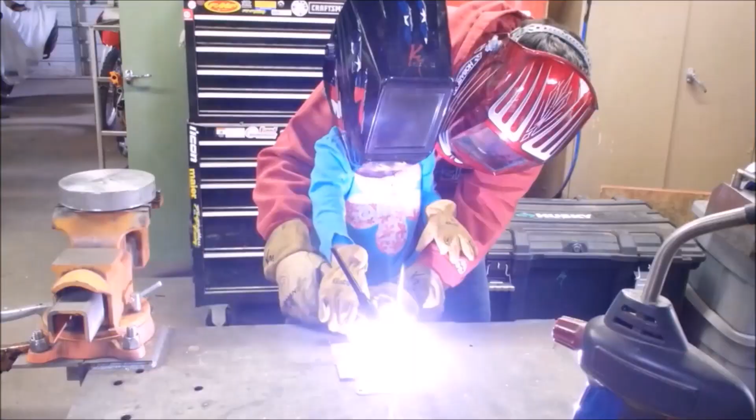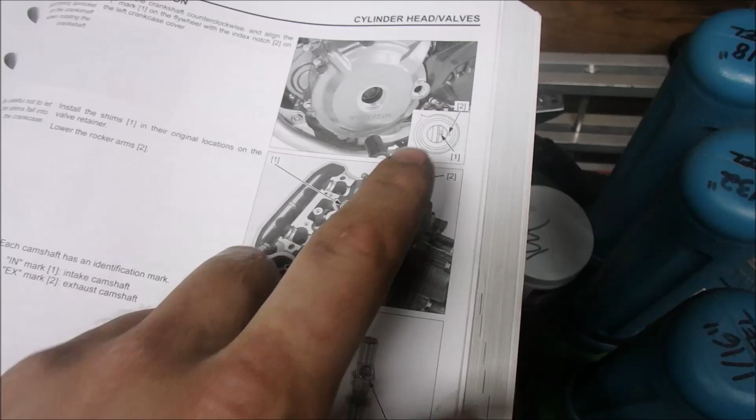Alright, so we're going to reinstall the cams. Now, you want to make sure that your timing mark is still correct on T. Put the valve shims back in, which is why we labeled them so specifically. And then with the cams, flip this around.

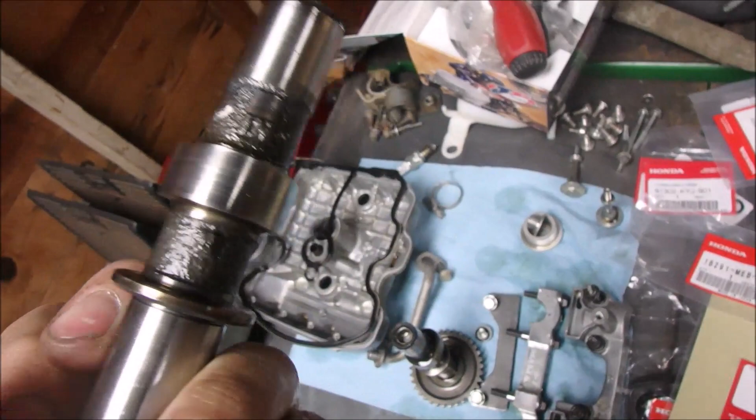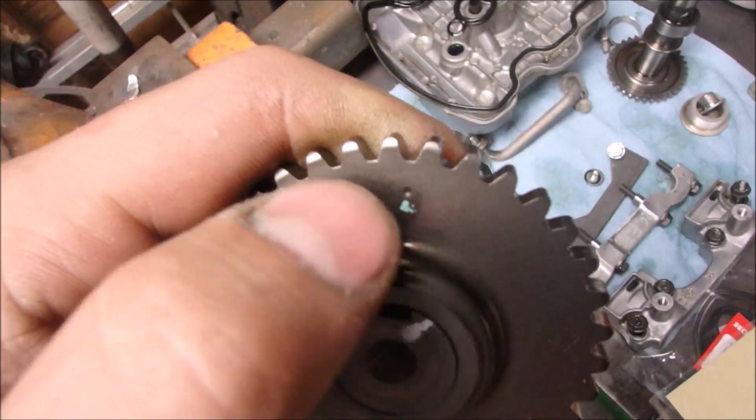Right there it says IN for intake, and then on this cam it says EX for exhaust. If we look on the face of it here, that mark right there at the top is our timing mark. Now this is the exhaust cam, but both of them say intake and exhaust on them. That's so you know it's the correct way around, because if you have it this way, your cam is 180 degrees out from where it needs to be.

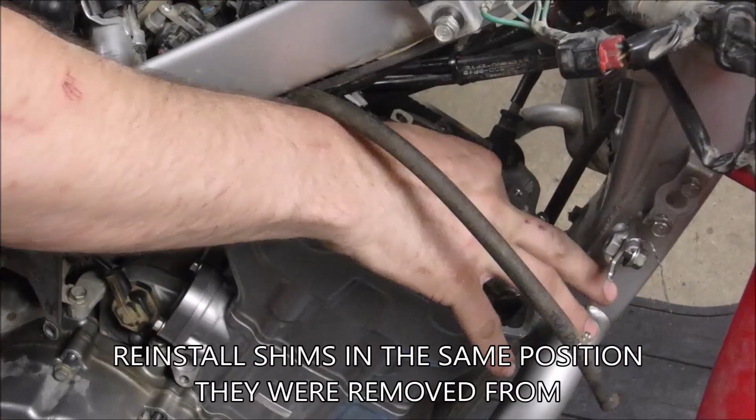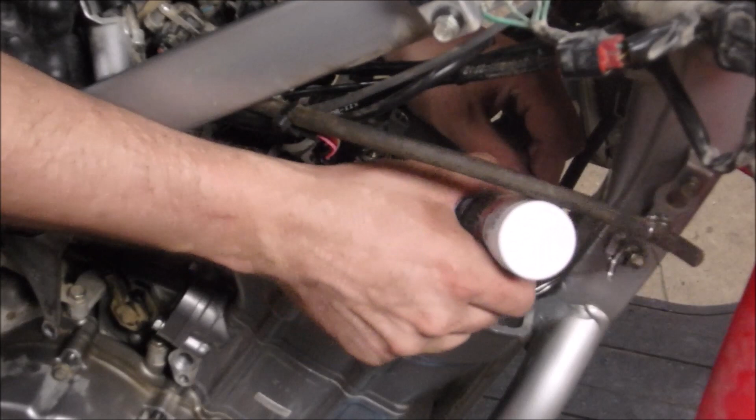And then these little marks underneath go level with the cylinder head. So we'll go ahead and start putting this together. This would be a very, very bad time to drop something down into the engine, so be very careful when you're doing this. It probably wouldn't hurt to take your assembly lube and just put a drop of that on top of each of these shims.

Because anything you took out and handled or cleaned, there's a potential that you took all the protective oil off of it. And when you start it up, you do not want dry metal parts rubbing each other.

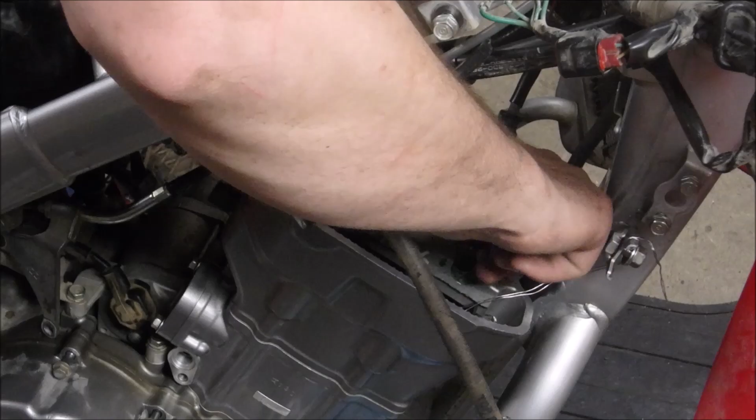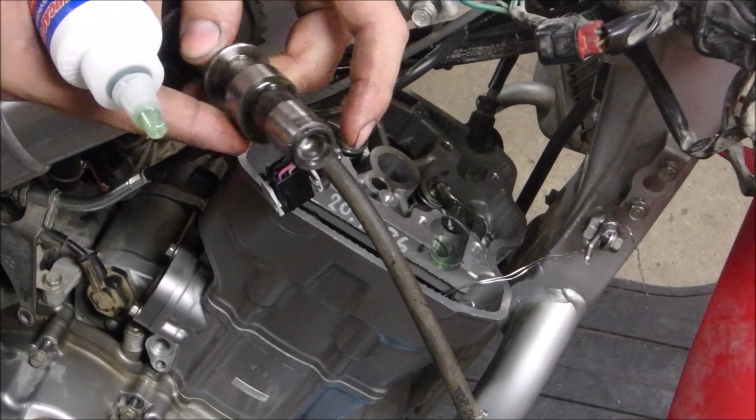I'm going to put the exhaust cam in first. We want to put some assembly lube on all of the journals here. Spread that around a little bit, make sure it gets covered. And then we also want to put it on the cam, on the surface where it rides in that journal. We also want to put some of this on the actual cam lobe.

Anywhere metal touches metal, you're going to want to have this assembly lube.

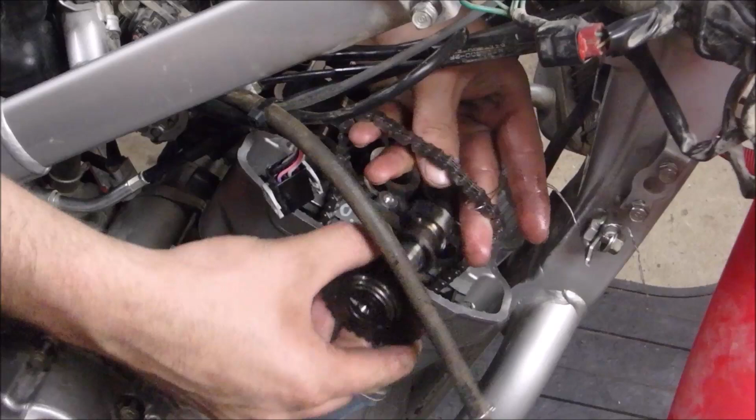Pull our cam chain up. Now I just laid the chain on there, just loose. It is not timed correctly, obviously. I'm just laying them in there for now so that I can get everything kind of lined up. So I'll go ahead and put some more assembly lube on.

Now at this point I'm going to go back in with my screwdriver and my vice grip, and I'm going to relieve all the spring tension from this cam chain tensioner. That's so I can fit the other cam in.

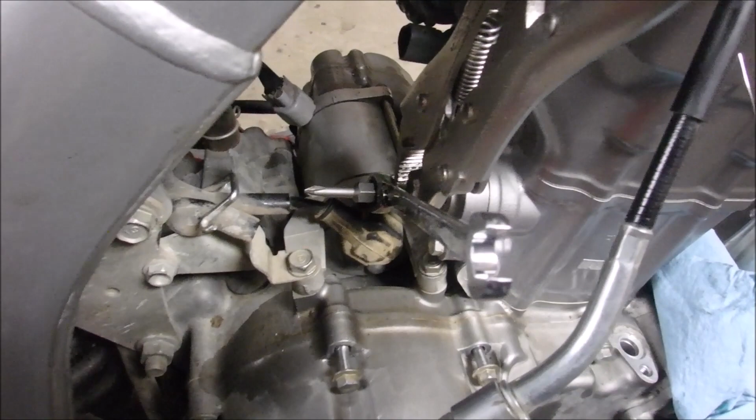I came up with another method. I had been using like an eyeglasses or precision small terminal screwdriver. This is the bit out of my 6-in-1 screwdriver, a 5/16 ratchet wrench, and then I'm using the vice grip again. Hopefully that gives me enough chain slack to put these in, which is what I was struggling with.

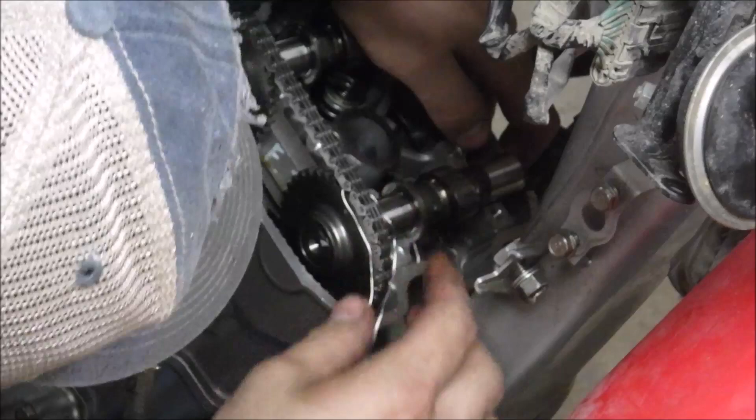There we go, but I'm a tooth off. Intake's gotta come 1 tooth over. Put the gear side in, and then pop it down. There we go. Okay, so through my struggles you can learn.

Put the exhaust cam in first, completely, and then hook the gear for the intake cam into the chain. Put the gear side into the cam journal, and then push the back side, the side opposite the gear, for the intake cam down. I still have my wire on there because I didn't know if it was going to fall in or not. So that's the cams in.

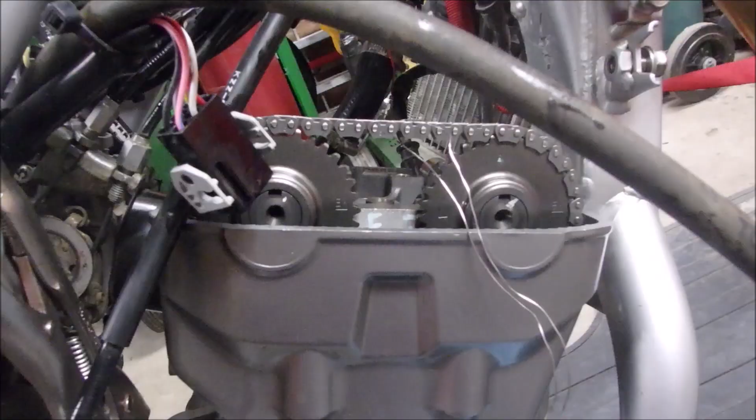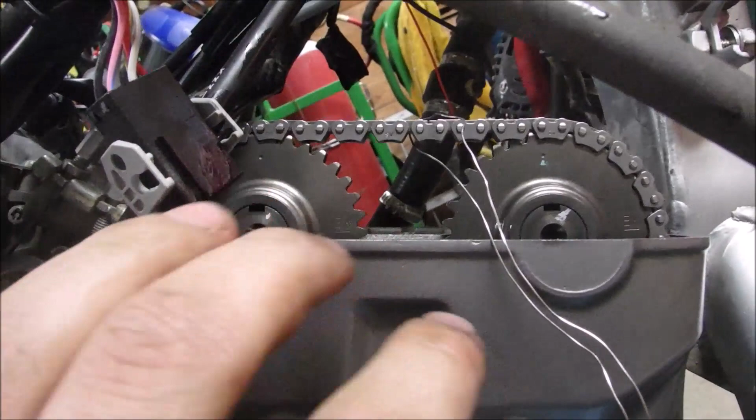Probably a couple of degrees off on my timing mark on the other side, but those marks in the cam gears should be level with the head, which on the intake side is down just a hair. Again, if I'm off just a few degrees, it'll throw that off. So that's the cams installed.

At this point we can go ahead and finally remove our wire that was around our cam chain, and then we can take our cam chain tensioner stopper device out.

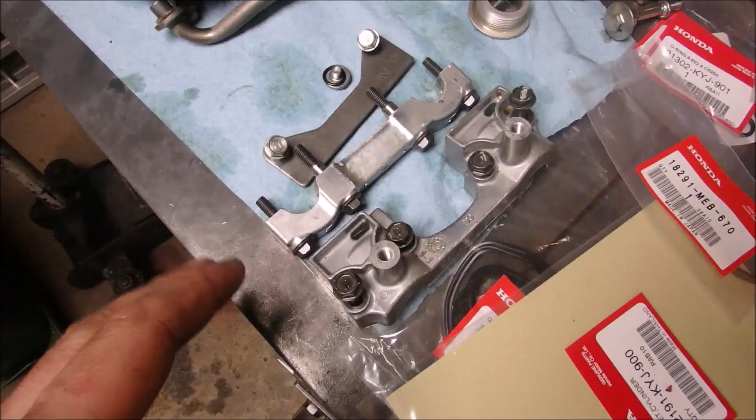Next we're going to install our camshaft holders. Again, we're going to put some more assembly lube on. We want to make sure everything is going to move when we start this thing. So I'll put a little bit more on top of the cam, since both cams I handled quite a bit. And then we're going to put some on our cam holder.

This is the right side cam holder. It doesn't have intake and exhaust marks on it, but if you look at it, it goes in this way so you can read the R when you're standing behind the engine.

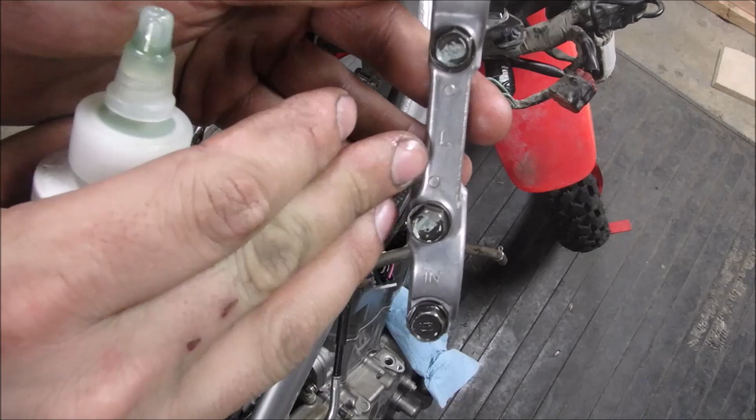Pop that into place. The left side here has the L for left, IN for intake, and EX for exhaust, because this one would be pretty easy to mix up. So we'll go ahead and hold all our bolts so we don't lose them.

Remember, you can look back at my earlier episode with the cams, but I can tell you again now: on the left side, the long bolts are in the center. On the right side, the long bolts are on the outside. And that is important.

So there we go. Oh, I didn't put any on the cam, but I put quite a bit on here. Now is the time that if you're unsure, pull it apart and check.

I did pre-lube those cams before I put them in anyway. This is the super critical part that you have assembly lube on. You do not want to put these cams in dry. You will have a very, very bad day.

The manual also suggests to put engine oil on the chain, so I'll drizzle a little bit of engine oil on top of that chain too. The next step is tightening down these cam holders, and the manual says 12 Newton meters, or 9 pound-feet, in a crisscross pattern and in several steps.

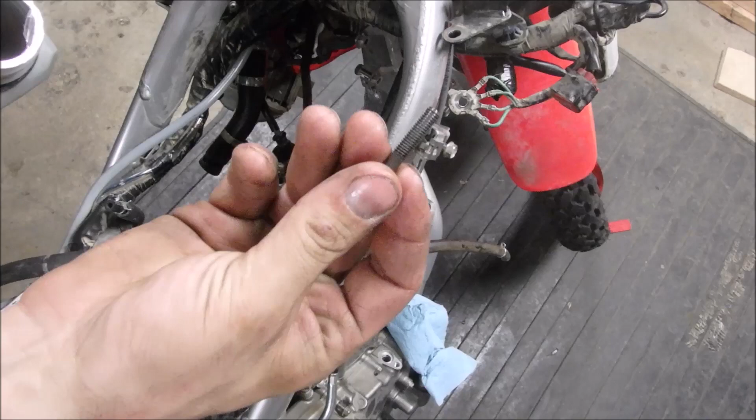So the first step is I'm going to just run the bolts down with a socket. Something else before we torque them, I almost forgot this: just put a little bit of oil on the threads for each of these bolts.

I'm going to be using Newton meters just because it's convenient. Initially I'm going to go to 4 Newton meters, then up to 6 Newton meters, and our final setting of 12 Newton meters. So let's do it.

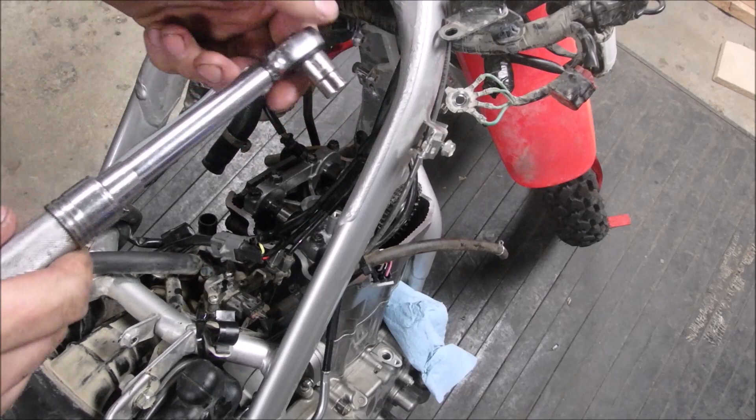With the torque wrench, you don't want to be going, oh, there it popped. You want a nice smooth movement and have it go click and then stop. Because if it clicks and you keep going, well, you didn't do the torque right. So again, don't pop the torque. No, that really wasn't it—a nice smooth movement and have it click as you're going.

Cam chain guide. This just says fasten securely, because this isn't actually holding the cams in. At this time we can put a new O-ring in here with a little bit of motor oil on it.

Do our cam chain tensioner. We can put that bolt in on top of it and go ahead and tighten that up.

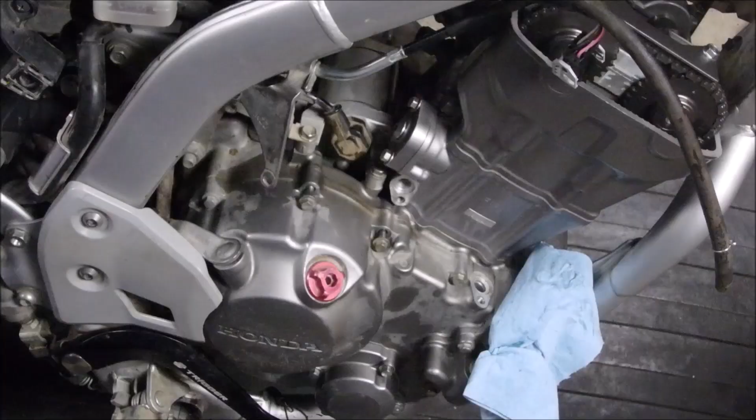While I'm over here and thinking about it, we can also put some new O-rings in and put this water pipe back in. This only goes on one way, so the bolts only go in one way. Make sure you use new O-rings—you don't want all your coolant to leak out right away.

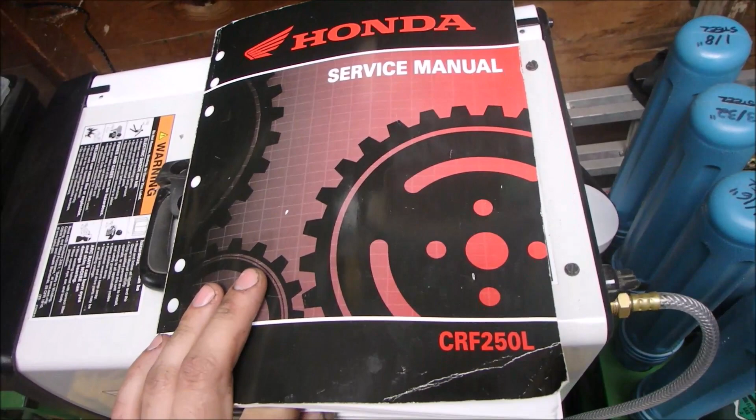A couple quick things I wanted to share with you guys. I've been using a Honda factory service manual, which I got from CRFs Only. You can buy these—they're not like manufacturer secrets.

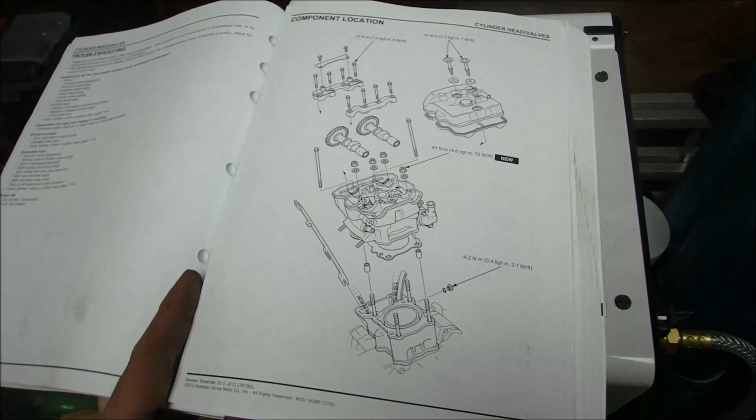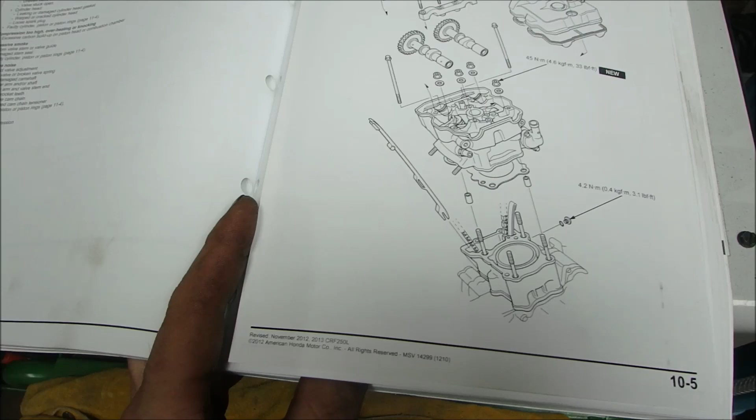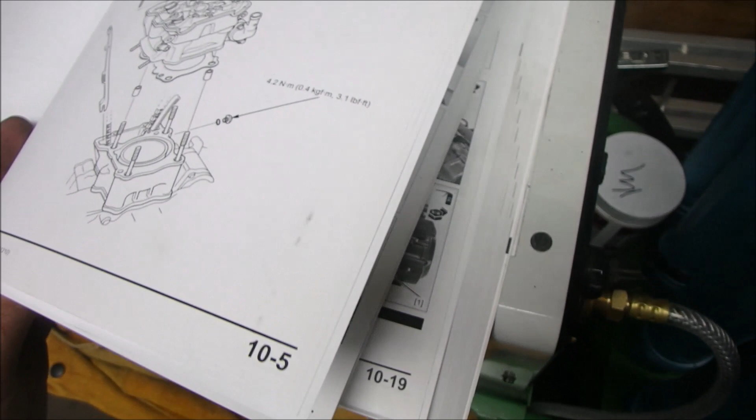One thing you will find if you use the online versions that I've seen a lot of, like Facebook groups have, is that their service manual is not revised—it's just a digital copy of the factory manual. And relative to what we're working on, page 10-5 here, you can see this is actually a sticker that they send with it that you put in over top of the old page. One of the things that they updated was the torque for the head mounting nuts.

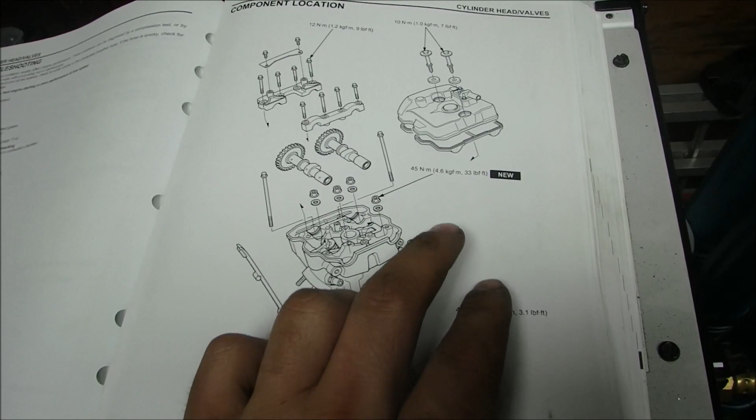So that's something important—if you see in your online version manual something different, this is the updated sheet from Honda that came with the manual. But this is available anywhere that sells parts, so it's a very helpful tool, especially if you plan on keeping this bike for a long time like I do. It's got step-by-step instructions on how to do literally everything to this bike.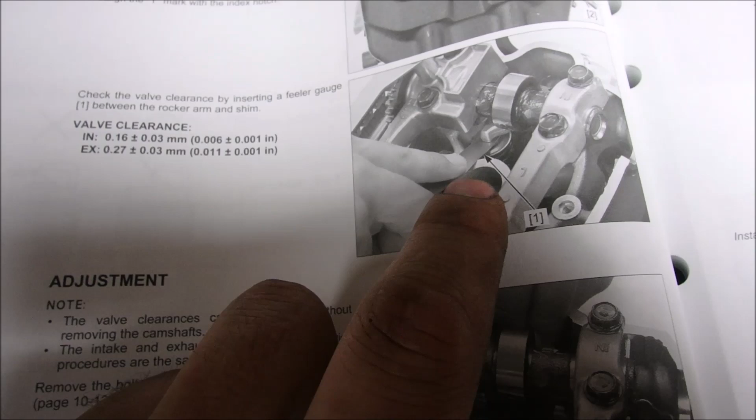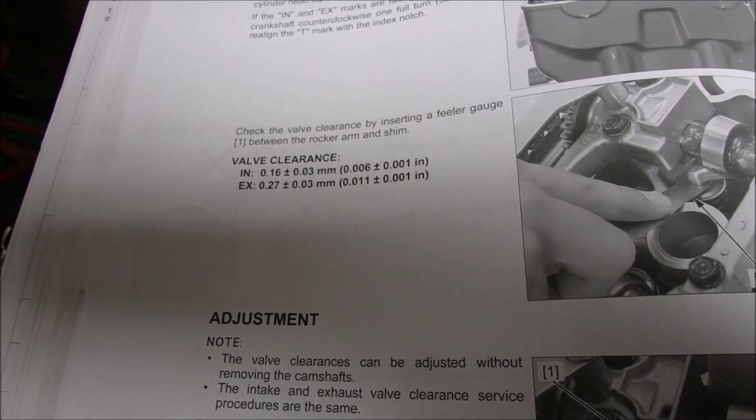Something I'm very sorry about that I forgot to record is the valve clearance check. You go in just like they're showing here, and there is your tolerance. Mine was within tolerance, and I am so sorry I forgot to record that, but make sure you check that before you put the valve cover on.